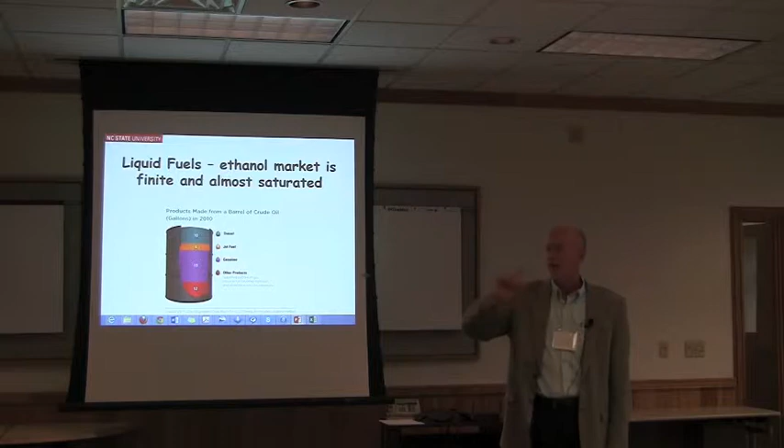So as you start to think about what technologies are going to get you down the road, you need something that starts to make hydrocarbons, or we have to completely change our distribution and transportation system. It's not the engines per se, but the automotive system, like they do in Brazil, where on any given day you can put whatever you want in your car. Go back and forth, okay? But right now, we're not there.

This is my attempt to show a whole variety of feedstocks, a whole variety of conversion processes, and a whole variety of products. And again, I think one of the challenges, we tend to say we can do anything with biofuels. Anybody that's got 40 acres has got a biofuels play. They're in the game. They're ready to go. And the details get real important. What are they growing? How are they growing it? What are they going to make? What scale are they going to make?

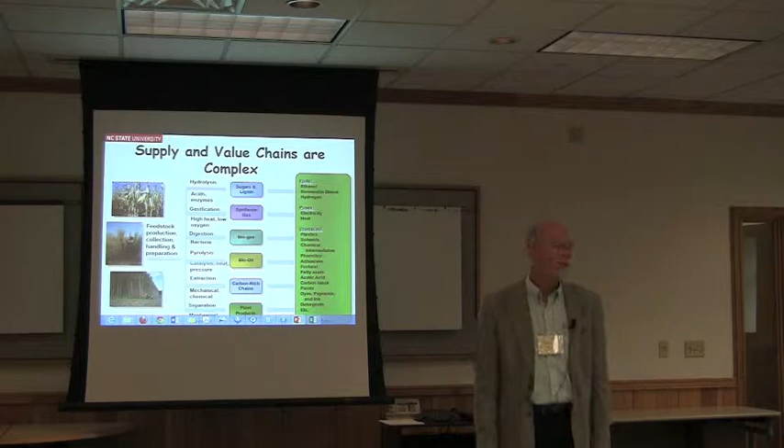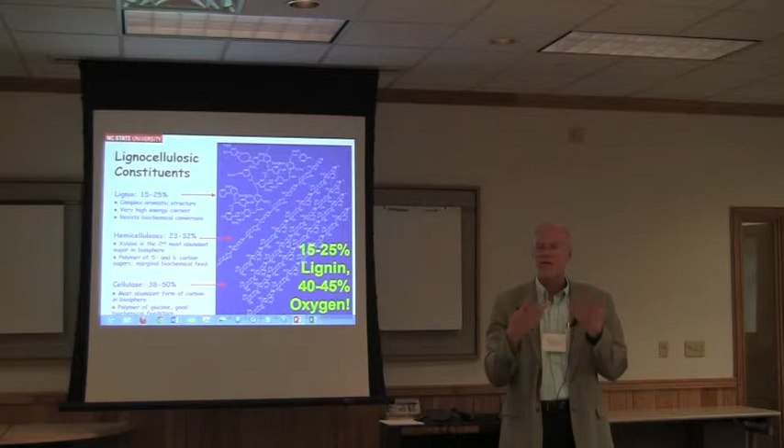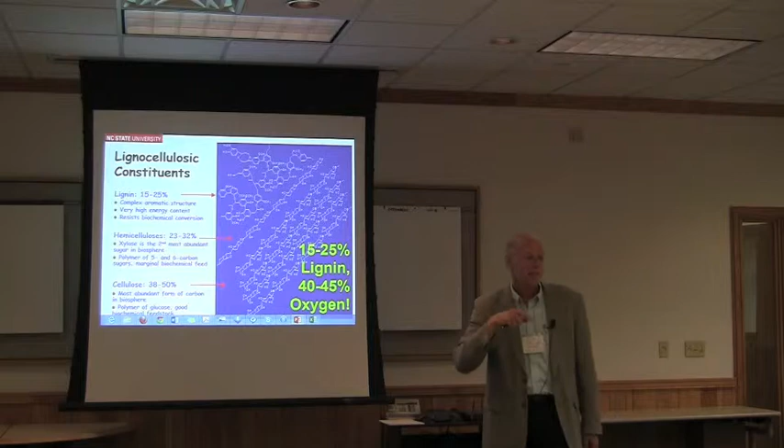So 1 ton of biomass and another ton of biomass, pine versus hardwoods, those could be maybe equivalent if you were going to gasify it, make it into these so-called Fischer-Tropsch liquids. If you're going to do a dilute acid pretreatment, enzyme hydrolysis, fermentation, your ton of softwoods isn't worth a hill of beans. It doesn't work, for a whole variety of good reasons, some of which we understand, some of which we don't. But your ton of hardwood, let's talk. We can deal. So these details matter as we start to connect the feedstock, the process, and the product.

There are a whole variety of activities underway. My real point is there are commercial scale biorefineries coming online: DuPont in Iowa, Abengoa in Kansas, and KiOR in Columbus, Mississippi. So there's a bunch of researchy things going on, but there are real biorefineries coming online, as was mentioned earlier. Now, whether they're making money is an entirely different question. But they are coming online. And frankly, we should know pretty quick whether they're making money.

To pick up on a couple of points, the location and the type of the biomass matters. For these global availability things, we need to work hard, and I think a couple of the talks earlier today did a good job of going from that national or state scale down to, I want to build a plant here. And the hard part of all of that is you have to say, I want to build a plant here. How much is available at what cost? And then, as Dennis mentioned, who else has got plans for that biomass?

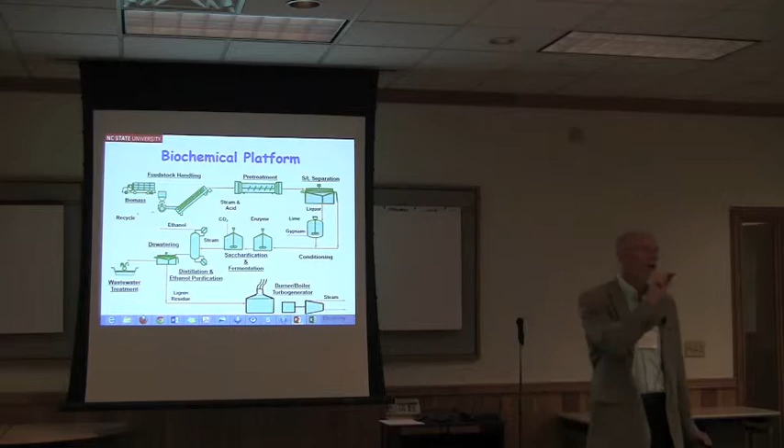Softwoods and these pretreatment technologies, with one exception, and I'll come to that, simply don't work well enough to be interesting compared to hardwoods and perennial ag residues. Again, there are chemical reasons for that. We can go into that detail if anybody cares. But as we talk about ethanol coming from cellulosic biomass, that really is hardwoods and perennial crops or ag residues. It is not softwood forest residue. It's not dead beetle-killed pine in the Pacific Northwest, Intermountain region.

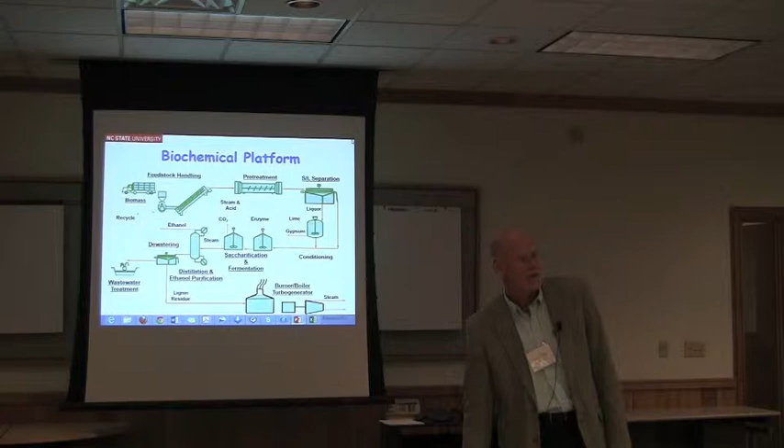So what do these actual conversion processes look like? I mentioned pretreatment, conditioning, that's basically changing the pH. We've got enzymatic hydrolysis, fermentation. Frankly, a lot of the capital is over here in product recovery and processing of residues.

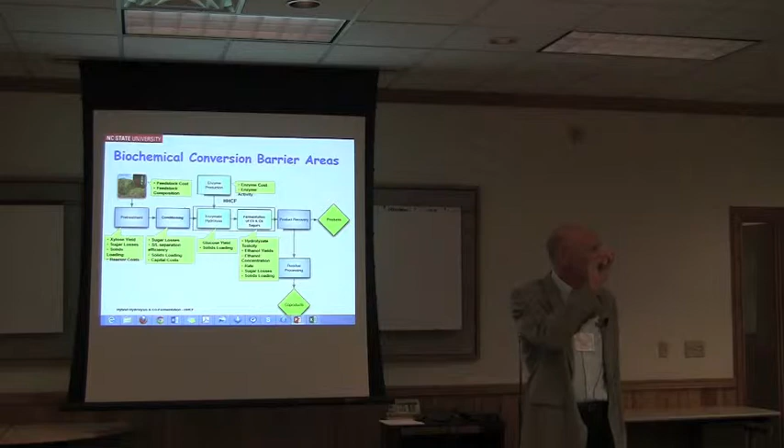Jim had a slide, I think, on the dollar per million BTU, natural gas versus wood, versus biomass. I'd pick on Jim a little bit, since he's a good colleague and a good friend, and I can get away with it. Actually, I Googled it, because I didn't believe that natural gas was up to $4 a million. It is. It's up 50%. With all this discussion about low-cost gas, natural gas is up 50% in the last 12 months. But anyway, what that slide didn't show was the cost of the conversion technology.

So you got wood, you got natural gas, both the exact same cost per million BTU. Jesse, give me a number. My number is it costs you 4 times more for the burner system for that solid biomass compared to a gas package unit. Even if they're dry, though. And you had to pay something to get them dry. So my point would be we've got to look at that whole system. And the inconvenient reality is a bunch of these residue processing steps, the distillation column, are unpleasantly, uncomfortably expensive.

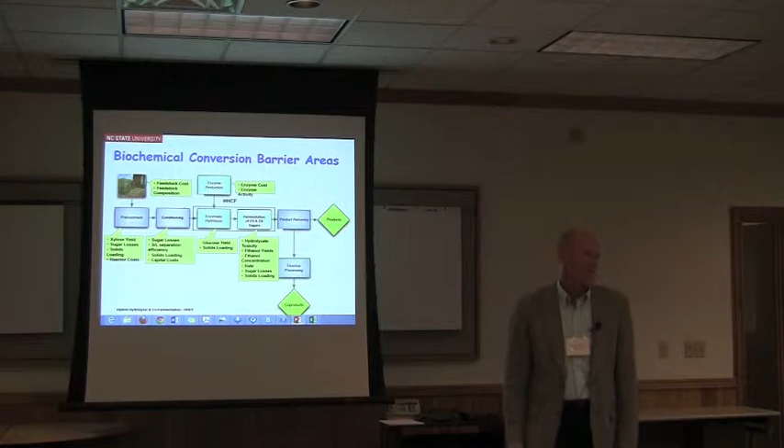So as we look at the system issues around the biochemical platform, you're only using the sugar. Frankly, Fermentation 101 says that only 50% of your sugar goes into your ethanol. For every molecule of your chemistry, all of you remember back to your organic chemistry, some with greater or lesser degrees of enthusiasm, but you've got 6 carbons, 6 oxygen there. For that single glucose molecule, about 52% of the mass goes up the pipe, goes up the stack as carbon dioxide. Okay?

So there are a lot of conversion issues just around the mass of material. Atom conservation is the vernacular people get into. You're throwing away a bunch of what you spent time and energy growing, and you're not recovering it. Now maybe that's a good business play. The life cycle footprint could even be pretty good. But boy, can't we do better than throwing half of it away?

Lignin. Lignin can be used for process heat. You got to get process heat for that distillation column from someplace. If you've got a good use for lignin, you can make chemicals, you can make surfactants, you can make carbon fibers, maybe. Or you just burn it in a boiler and you use it for process heat. Okay? But there's some challenges around making that economical.

To me, one of the more daunting ones is whether it's ethanol or butanol, at some point we've hit that blend wall. So you're going to make a product, and at some point you're kind of saturating a market unless you go to radically different ways of moving the material around and of using the material. Again, the analogy, maybe we can go to 15% ethanol in our gasoline, but if you really want to take the next step, you're going to have to go to 100% ethanol in everybody's flex fuel vehicle, or E85, depending on what system you like.

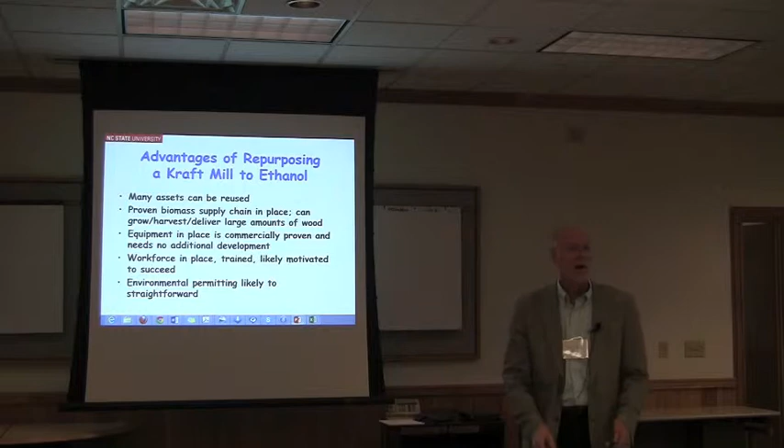You have a workforce. Again, looking at things that maybe are underappreciated, to have a skilled, engaged workforce, i.e. people that know how to make this thing run day in and day out, and know how to squeeze the last penny of operational benefit out of it, is a huge asset. And frankly, things like permitting are a big deal and can hang up many new plants.

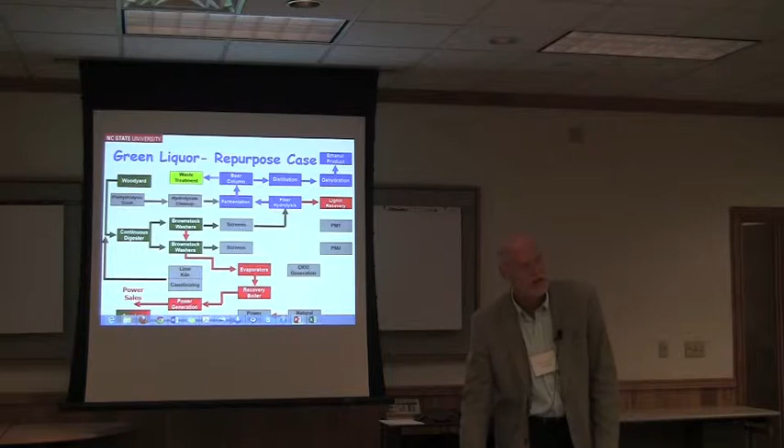So this is an attempt to give you a visual depiction. If you bought this pulp mill, what can you use? What do you throw away? What do you need to buy new? Okay? And depending on the details of what that pulp mill had and the process details, what you want to run, that'll vary a little bit. But you can use large pieces, large segments of that capital, that installed infrastructure.

Switching gears, so the second option, so that was ethanol. Ethanol 101. So now I want to switch gears and go to two technologies that try to replace that whole barrel. Where I said, all right, you're going to hit the blend wall, the 15% ethanol, and you're kind of done. So how do you get around that? So there are two ways, the so-called thermochemical platform, that allow you to make jet fuel, diesel fuel, and chemicals. And they take slightly different passes at it. So let me try to differentiate them.

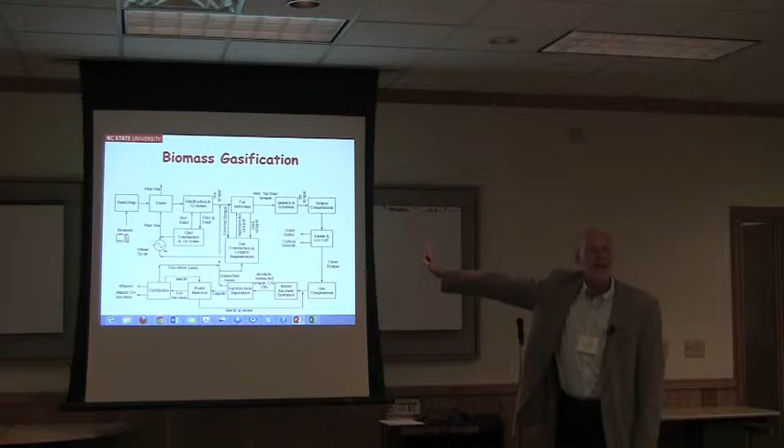So biomass gasification, this is what a gasification system looks like. And you're not necessarily supposed to be able to read that or understand it in detail. My point is, it's really complicated. Okay? Maybe take another shot at it looking at it this way, which may or may not help. Essentially what you're trying to do is make syngas.

South Africa takes coal, Sasol. The South African state oil company, due to apartheid, South Africa's economy ran on coal through the mid-70s. And frankly, they're still running those plants because they're really good at it, and they figured out how to make their hydrocarbons from coal. Essentially the same technology the Germans used during World War II. So you can make syngas from any carbon source.

In the case of Sasol, they make syngas from coal, and they go through these Fischer-Tropsch liquids, and they make diesel fuel. They make gasoline. Their entire liquid petroleum economy runs on coal to syngas to Fischer-Tropsch liquids to all these other materials. Okay. What we're really trying to do with biomass typically is we can make ethanol directly, we can make DME, which is dimethyl ether from methanol, which is attractive in some cases, or we can make mixed alcohols.

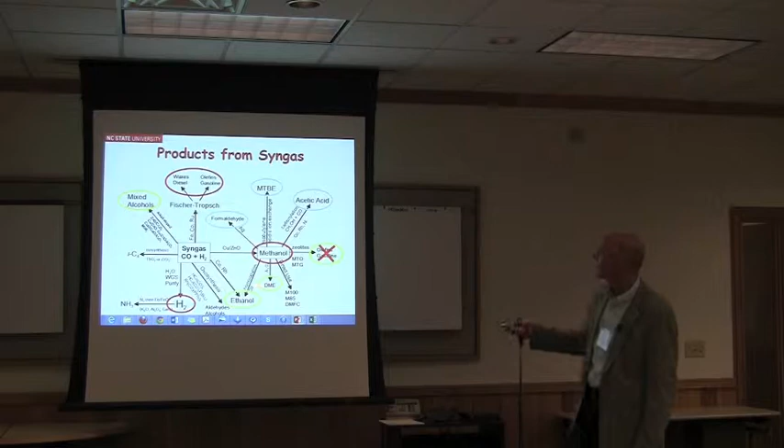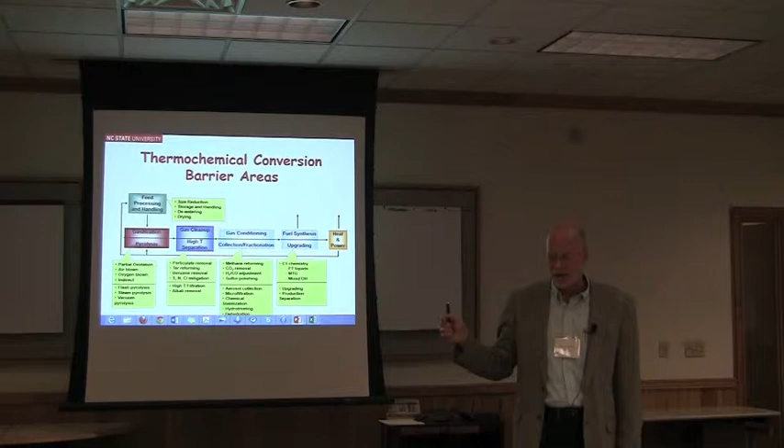Now there are a couple of other ways that we can go at it with the biomass. So specifically, as you look at the unit operations, you've got gasification, you've got to clean up that syngas, you've got to do some reforming, some shifting, fuel synthesis, get a lot of heat and power out of this. Back again to the point that Dennis made, heat and power integration is a way to increase your thermodynamic yield. And in yellow here, I've tried to highlight a whole bunch of barriers. This is taken from DOE, the Department of Energy, Bioenergy Technology Office, their barriers.

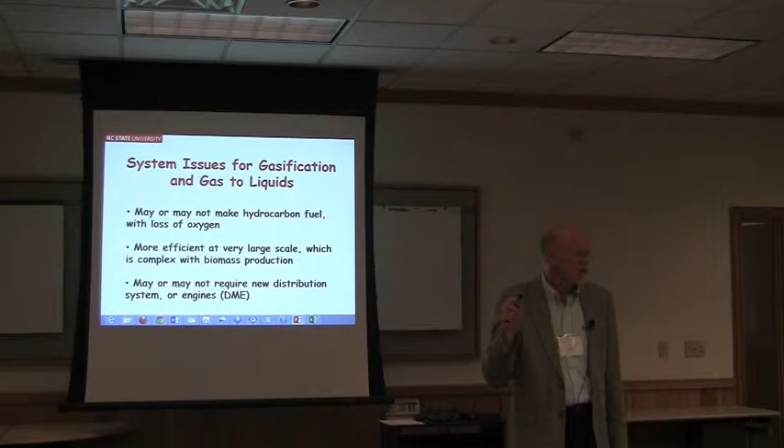So what are some of the problems with gasification? If you're making a hydrocarbon fuel, remember my PhD chemist union card slide. 40% of the molecules on that slide were oxygen. So you paid for a ton of biomass, 40% of that ton, 800 pounds, if I'm doing the math right, was oxygen. And you're throwing it away if you're making hydrocarbons.

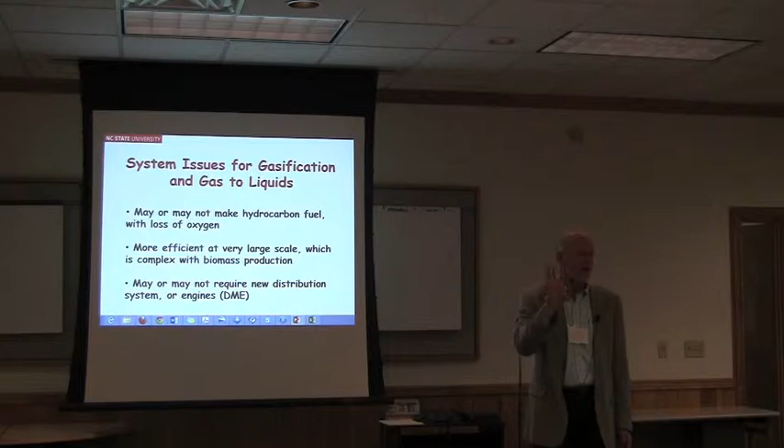And worse yet, you don't throw away oxygen as O2. You throw away oxygen as water, where you actually have to make hydrogen to throw away the oxygen. Or you're throwing away the carbon with the oxygen, carbon dioxide. And the carbon is what you really want to sell to somebody. That's your liquid fuel. Okay? So the big downside with the thermochem technologies, by and large, they're trying to make a drop-in hydrocarbon, replace the whole barrel. And the downside is, at best, 40% of what you paid for, you're going to throw away. And there's going to be some other stuff that goes with it.

The other problem with gasification in particular is these are very large plants. So the Sasol plant is basically a couple of coal mines that are directly connected to a gasifier with really miles and miles of conveyor belts that are directly feeding the Fischer-Tropsch, that make the Fischer-Tropsch liquid and feed it into a petroleum refinery. If you kind of do the back calculation of the caloric value coming out of that plant, it would be 25, 30 times bigger than the biggest pulp mill you ever saw.

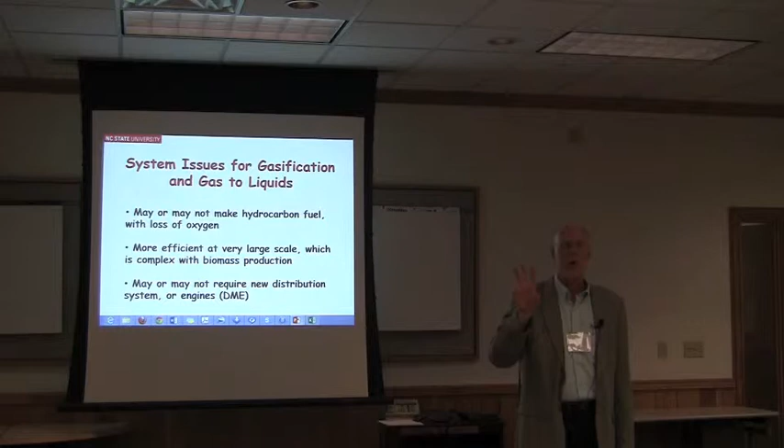Okay, that's a big plant. All right, you're not going to do that with biomass. Okay, let's make it smaller. You know, make it look like a pulp mill. Well, what did I say about capital cost? Bigger is better. Now, the unfortunate reality for that complicated integrated system, squeezing that down to 1/25th of the size gets tough. Okay.

There are other ways, DME, dimethyl ether. I bring that up because that's one way to sell the oxygen. Ether, you've got oxygen in that product. You can actually run it in a diesel engine. Volvo makes a DME engine. You can buy dimethyl ether in Sweden and run it around on a Volvo truck. Okay. It also could be a propane replacement. Okay. So it's one way to sell that intermediate oxygen.

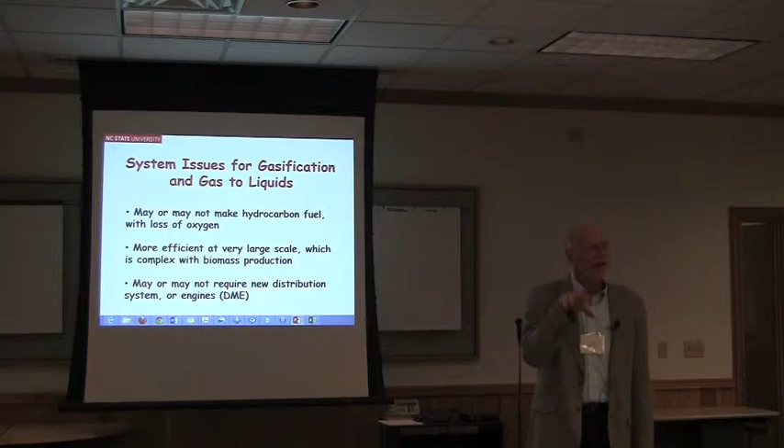So gasification, what do we need? We need higher efficiency, and that is partly the gasification itself, but to Dennis's point, that's also how do you use all this waste heat? You've heated things up to 900 degrees C. You've got a bunch of exothermic reactions. You've had to heat up and cool down a bunch of stuff. Frankly, you're wasting a bunch of heat unless you can find a really productive use, like a small city to put next door to this thing. A small city in a really cold climate.

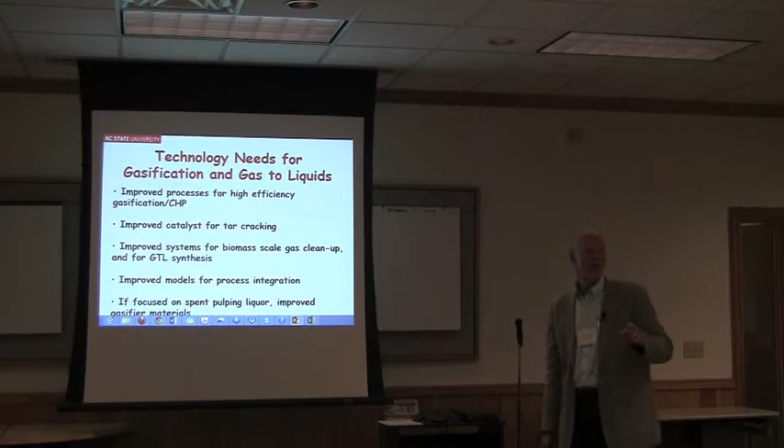We do need better catalysts. There are scientific, technical, engineering, chemical needs. The scale of the cleanup in particular is challenging. A bunch of these process integration things get real important. Part of this is to keep score with the life cycle attributes. Part of it is to understand if I push the scale in this direction, what happens over in that direction.

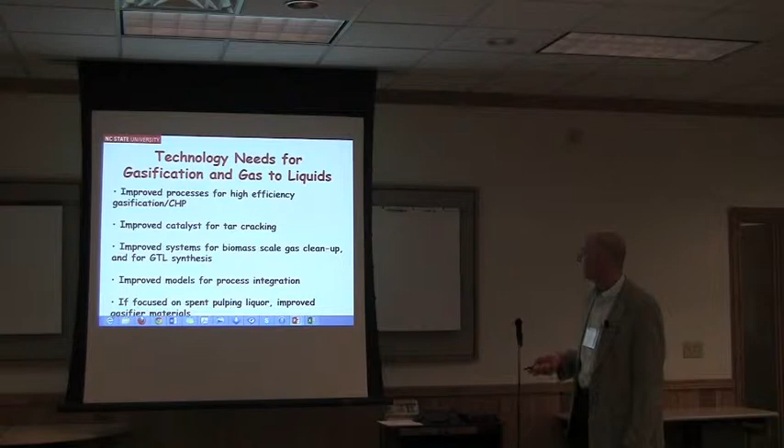There has been a lot of work in Scandinavia on gasification of spent pulping liquor. The New Bern mill in North Carolina, the Weyerhaeuser mill, ran a black liquor gasifier for a number of years. They weren't trying to make fuels there. They were simply demonstrating the gasification technology. There are a lot of materials, corrosion problems with black liquor gasification. Weyerhaeuser is no longer running that operation, but that technology is being commercialized in Sweden.

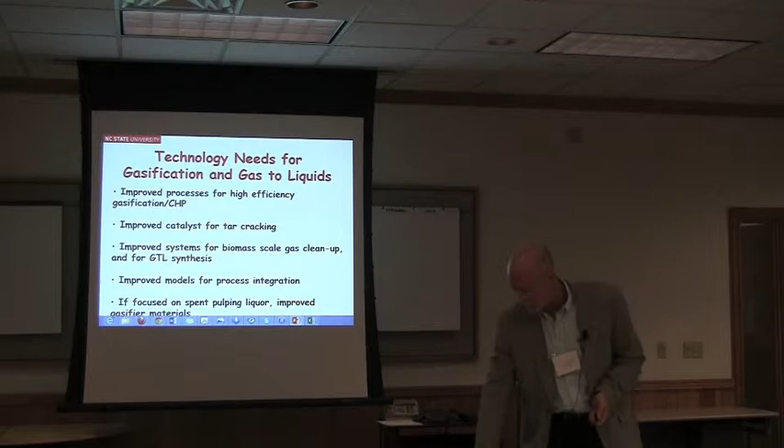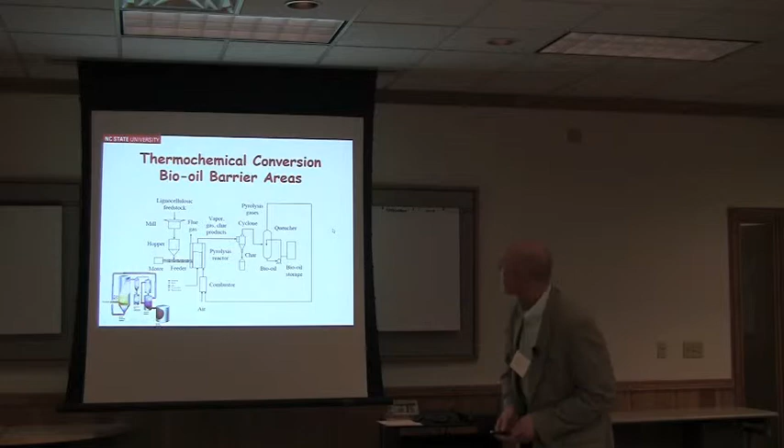Okay. So the other way to go at thermochemical that in some ways is a lot more attractive from a capital and a size point of view is the so-called pyrolysis or bio-oil technology. Essentially, you're feeding the biomass into a fluid bed reactor, you're collecting the fluid bed material, recycling that, collecting the bio-oil, and now you've got this black tarry stuff. It smells a lot like barbecue. Not all so good in a sense.

It looks something like this. I found an image that tries to highlight that there are a number of liquid, solid, fluid handling systems that get a little complicated. But the nice thing about pyrolysis is that it is a commercial technology. People have been running pyrolysis operations at the 250 ton a day scale for at least 30 years.

And when I said barbecue, I was only being a little facetious. It is a company called Red Arrow in Manitowoc, Wisconsin, and of that biomass that goes in, they sell about 1% of the weight of that biomass coming in the door, dry weight, into the food market. They claim that if you go into your average kitchen, refrigerator, pantry, there are going to be 28 items that will have their barbecue smoke in it.

Any frozen dinner kind of thing, any kind of baked crackery thing, not just the spicy pizza barbecue ones, but anything. Almost all processed meats. Okay, a lot of cheeses. This stuff goes everywhere. Soups. Okay. So my point is not that we all should focus our business ventures on barbecue foods, but rather the technology for making this pyrolysis oil is something that we know how to do.

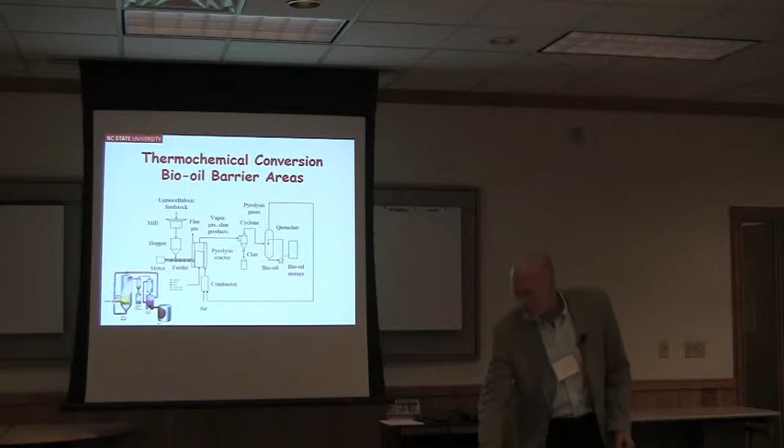The problem with pyrolysis is it is not the final product. Yes, you do have this gunky oil. Yes, people have tried to burn it to replace a number 6 bunker fuel, for those of you that are in that game, heavy diesel. You can actually burn it in a diesel engine, but it's frankly a pretty rotten fuel. It's pretty corrosive, and nobody wants to buy it. Okay. Really, it's not the final product. It's an intermediate.

So you can make this at a small scale, but it is a complex mixture. It is an intermediate. The reason it's an intermediate is it tends to be reactive, corrosive, and hazardous. Other than that, it's great. So some shipping issues.

What you really want to do, you're going to end up hydrogenating it. So you're going to take this bio oil that's pretty corrosive, pretty reactive, and you're going to throw hydrogen at it with some catalyst. And you're going to pull out some of those reactive components. You're going to neutralize some of those acids. You're going to take a yield penalty. But you can now make an intermediate that is miscible with gasoline.

So KiOR takes in whole tree logs. Go Google KiOR and look at the images you can pull up. Now they've got a big log deck. They've got a big chip pile. They go into their pyrolysis reactor. They don't say it real clearly, but they go into a hydro-treating tank. They go into a barge that goes upriver to Memphis to a Valero oil refinery.

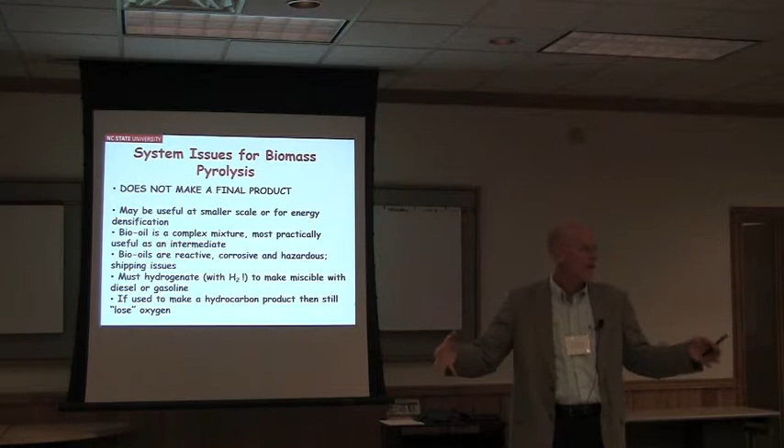All right, so you can start to think now about, back to James, some of your examples with distributed. You start to pick sites that may be around 300 miles away from a central point that might look a lot like a refinery, and now all these little sites are shipping an energy-dense, higher value product. It could even go into a pipeline potentially, depending on how you upgrade at the site versus how you upgrade at the refinery. And now you can start to think about models where you do get the integration, you honor the carbon, the landscape, and you can start to balance these.

So what are the challenges? We need to figure out how to make the bio-oil more stable, in particular low acid. That's going to involve catalysts, whether that's in the bed or post-pyrolysis. The supply chain gets really fun, challenging, okay? So, if you start to think of a central hub and the spoke-like ring of little tiny pyrolysis units, and now you're trying to balance carbon, money, landowner interest, and policy.

Well, you could say, well, gee whiz, that's too complicated, I give up. Or you could say, yeah, that's complicated, and that's what we do, is we start to bring analytical tools, life cycle analysis, and life cycle inventory, policy, economics, GIS tools, bring them all to bear on this challenging problem and look at these trade-offs.

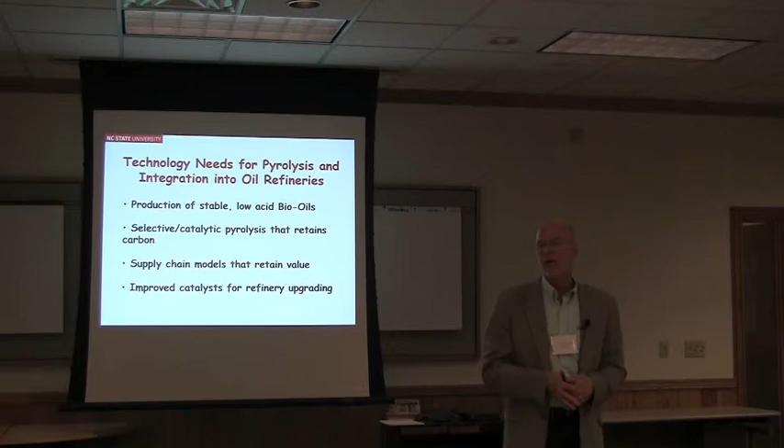What we don't do in academia is figure out who actually should put money where, but that's a different discussion. And there are some demands on the refinery. Frankly, they'd just as soon not actually have your bio-oil. If you hold a gun to their head, they'll take it. But there are some challenges where maybe their refinery catalyst could be made more robust. That side door that our bio-oil goes into has got a couple of unit operations in it that could be improved.

Okay, since the two experts, Jesse and James, talked about life cycle, I'm not going to spend any time on it. But I think the question that was raised earlier that I just want to reiterate is, at some point to simply say we're biomass and we're not oil, therefore we're good, is A, analytically not very rigorous on our part, and B, frankly, not always the case if you don't do a good job with your unit operations, with your process. To say we're biofuels and we're better than corn ethanol, again, prove it.

The heck with these claims. Let's get some data. Let's have a robust debate on it. I don't like your number here. I like this number over here. Let's talk about it. So life cycle is, to me, a pretty good way of doing that.

Now, as James highlighted, we don't have perfect data and these systems are still underdeveloped. That's great. But it's a way to start. It requires a lot of transparency, and a lot of details get buried under pretty pictures. But as long as you've got the details and you can get them out and make that part of the discussion, I think it's a useful tool, a useful approach.

What we do in particular, though, if we think about the blocks of information with biomass production, conversion, utilization, right now we have pretty good systems for knowing what to grow. Again, switchgrass and the GreenWood guys growing poplar, they'd say, well, there are 30 things that we'd like to know better about our cost, our production rates, our life cycle impact. But we've got examples, okay? Fuel utilization, we know how to do that. Cars go down the road.